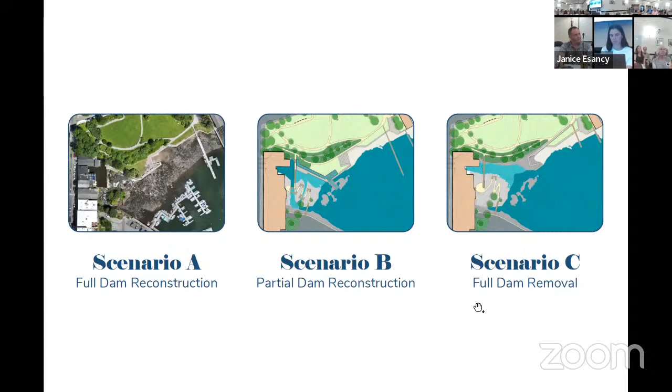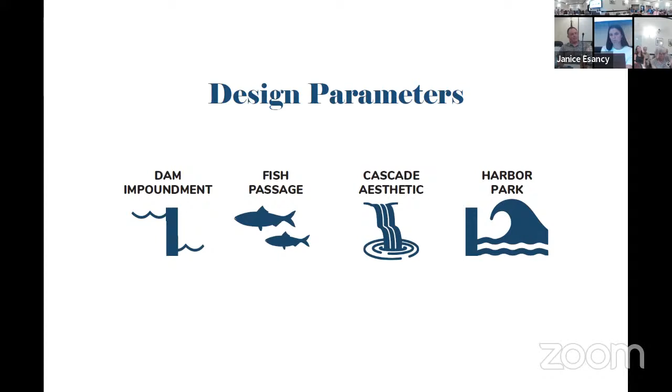Last time, you were all very helpful, very clear and instructive on 4 parameters for each of those designs: how much impoundment, what the type of fish passage should be, what the aesthetic of the cascade should be, and how we should think about Harbor Park.

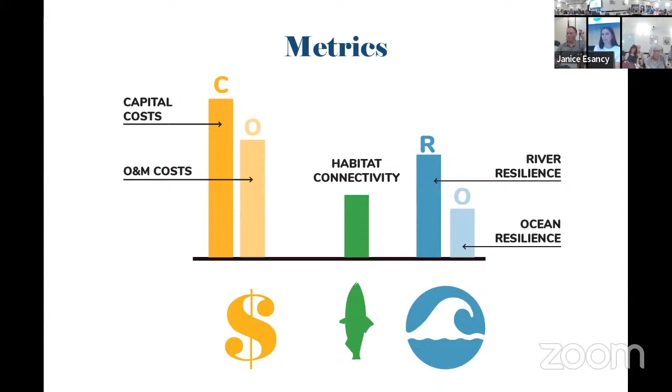Today we're glad we can report back with some metrics to help with your decision-making and with the conversation. We have numbers for cost, habitat connectivity, and resilience - the metrics we agreed were very important for you all to make this decision. Assuming that's clear, interrupt me with questions, comments, anything you need.

Scenario A, our status quo. These are the parameters you gave us last time - in this scheme we will reconstruct all dam infrastructure in kind. That would include restoring the cascade aesthetic to a uniform flow over a weir edge. It's a little toothy right now because of the condition of the dam, so getting that back to a uniform flow.

There's an asterisk: in a very dry time of year, water flow gets very low. It can't be uniform, it's just a really wide waterfall. So there's a point at which there's just not enough water coming down the river for a uniform flow. But to the extent we can, this scheme makes that weir perfectly flat so it flows over.

Would you entertain a question at this point? I don't know if - no, sorry, just for the comments. I advanced too quickly. Okay, here we go.

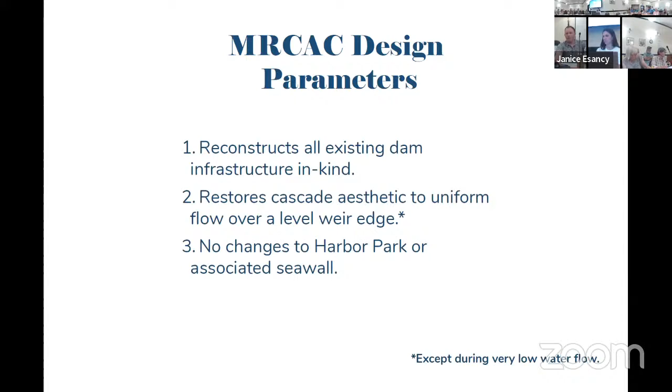So this is the space from above. You can see the edge of Harbor Park, the grounding basin, and where the cascade begins going up over the ledge. You have the weir edge here, the seawall here and wrapping around, with the buildings on Main Street all backing onto that.

We have a south cascade as well as the east cascade. In a reconstructed condition where we get that uniform waterfall condition, water would spill to the east and to the south, so you have less of a divided set of cascades like today. They still split at some point making their way down the rocks, but are more cohesive up at the top.

Just to give you your bearings, because this will be the same in the rest of the drawings - this water line is mean sea level. So this isn't sea level rise, it's not high tide or low tide, it's the mean sea level somewhere in between. The water flow coming down the river we're showing generally as average May flow.

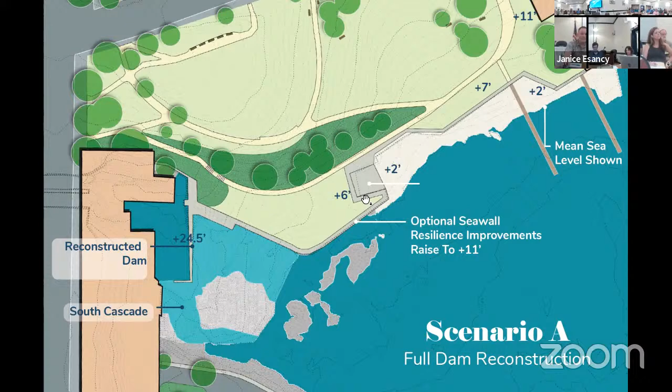I think that's at the crux of this question. So this is what it will look like - you recognize it, this is what you have today. Zooming in, you see the weir edge would be consistent, waterfall coming through here, it would be rebuilding this wall if you chose to do that. We haven't rendered raising it, since this is an existing photo. So one of our discussion points today could be whether that's what we want to do - this is at the existing 6 or 7 foot elevation.

When we look at costs - apologies, this is kind of small - the capital cost for rebuilding this dam is 2.8 million. I believe the base level was 2.6... 2.2, my apologies. So to rebuild the dam and fix it up is 2.2 million, which includes replacing the seawall in its present form - so fixing the wall and fixing the dam, $2.2 million.

And then over the course of 50 years, maintaining that will be an additional 1.8 million - that's the money you need to spend every year for 50 years to keep it in good working order, periodic repairs and maintenance. It goes up to 2.8 million if you want to elevate Harbor Park's edge up to 11 feet - that's the cost of additional higher walls and more fill, a difference of $0.6 million, $600,000 to raise it.

Scenario B. Yeah, so that was our baseline. Scenario B, this is partial dam reconstruction. This is the kind of middle path that tries to compromise and meet a lot of different potential criteria. We had a great presentation last time from Mr. Grassi, and this looks most like, I think, the design that he shared then. So this lowers the impoundment by 4 feet, modifies the bedrock to sustain the cascade to the south. This will all make sense when you see it on plan. It creates a uniform flow over a level weir edge, and in this case we're beginning to adapt Harbor Park more significantly. So with Harbor Park, we've got 4 things going on: we're introducing a pool and weir technical fishway.

We're elevating the park to reduce marine flooding, improving seawall resilience and public access to the waterfront, and where suitable, introducing living shoreline strategies. On that last one, I think that's where we still have more work to do. It's tricky working with the vertical seawall and a site like this to get a true living shoreline, so probably more to be thought of there, just full disclosure.

All right, so, yeah. I apologize if you've already defined this in the first hour that I missed. Can you go back just with that term? Which one? What is a living shoreline?

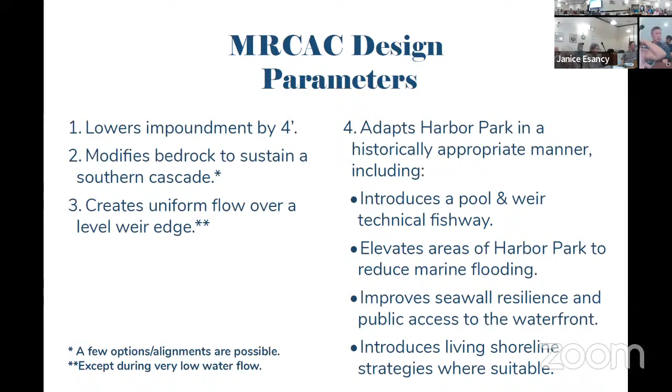Is that fair? It's great. Ooh, great. Yeah. Thank you.

So the aspiration here was to look for opportunities for that. It's tricky, so I don't think we have the best solution in here yet for that piece.

There's a lot going on in this plan. If you squint, just to begin, you'll see we still have a weir edge, an impoundment, a pool here at the top of the dam. We have the current alignment of the seawall still legible here. We'll get to what's going on down at the east. Some new things - we're seeing a pool and weir technical fishway coming down, hugging that seawall, doubling back to keep dropping down, coming through the seawall and out into the water. That's our fish passage. You'll see with these spot grades...

20.5 for the weir edge, so the top of the dam is 20.5. Today it's at 24.5, so this is coming down 4 feet.

What you're seeing over the top is one of these public amenities that Mike mentioned that's not in the budget, but something we're putting out there as an idea - a pedestrian connection over the top of the impoundment, linking you out to the ledge and a trail eventually to another bridge, linking you to the landing to the south here.

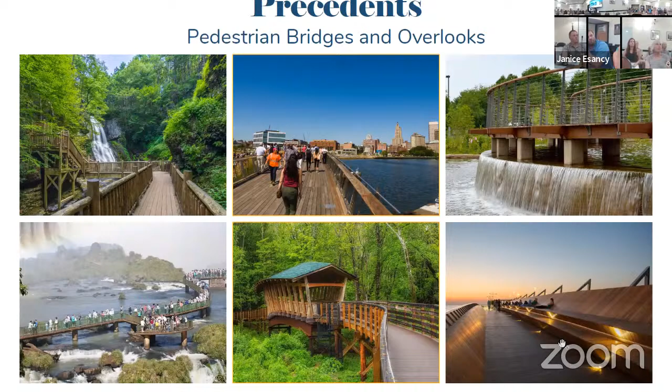And I think it would be good to break out the seawall stuff in this one as well, because all the work you did with the seawall here could really be done with the first option too. They're really almost the same, and it is what's in that cost, so we're carrying the seawall cost in the first one as well. That's the highest seawall cost and it's in all of them, so you're paying for that in all of them — you can take it out or leave it in, but the cost is relative.

Apples to apples still. We don't want pedestrian bridges or overlooks, so forget that I mentioned that — this interpretive signage was sort of building off of that idea, but might still have a place in some of the other parts we re-envision. I think the comment was that it kind of busies the concept, but I think it's still cool to consider some of those ideas. I don't think it's off the table at all.

Out of the last meeting, our task was to look at what else could happen around this, so we put a lot in to sort of feed you ideas. It's for the committee.

And I think the potential for some of that baseline is really cool, so I think it should be considered. I guess I'm just thinking, if you assume a base case for that option, how does that implicate the fish passage?

Is the lower portion, as you get increasingly above elevation 7, you have water cascading down into the fish passage from overland and things like that. Something we don't have to sort out tonight.

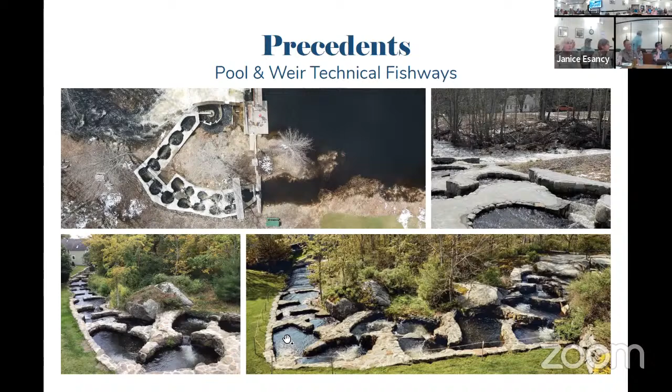Scenario C is full dam removal, right there in the name. It removes the existing dam infrastructure, does not modify the bedrock or create a constructed fishway. That was guidance from you all.

We've added the caveat with the asterisk that once you get in there and remove it, bedrock work is being done. There might be some selective tweaking just to take out barriers and make sure it works as fish passage, but this is not like previous examples you saw where there was really a built, nature-like fishway being put in.

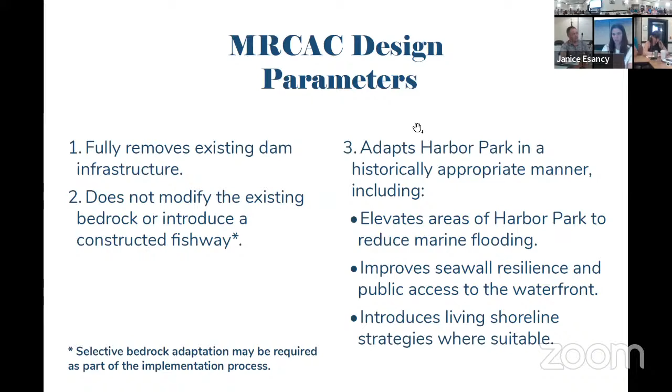This is exposing the ledge. It also adapts Harbor Park, and you'll see why.

Okay, so again, this is May, average river level in May, shown here. This is mean sea level for the ocean. It also has pedestrian bridges, trails, overlooks, all that.

Here we have the ADA accessible path shown as part of the baseline, because the existing path, which sits down here, goes away to allow us to open up the bedrock and the free-flowing river. So that requires regrading down through here to get down to that river elevation.

So you can see the contours in the background. This is where the seawall is today, right here. So if you take that away and take away the earth that was put in place to build this landscape, and reveal the historic ledge and historic river course, using the bedrock measurements that Mike's team did, this is where the river once flowed, right here.

So the waterway comes through here. In this area, we have a mixture of bedrock and boulders that are revealed when we pull back the soil, probably some cobble and boulders put in place just to shore it all up.

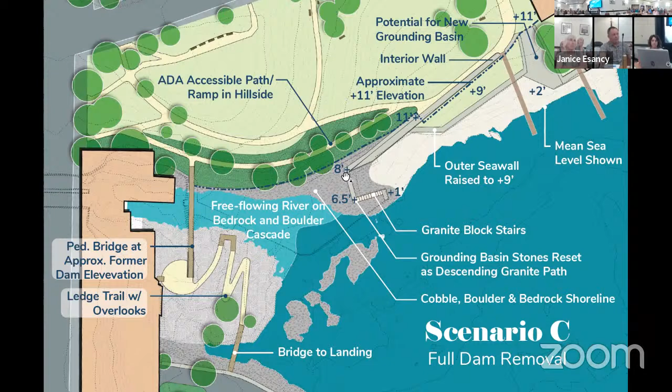Here, so much of this end of the park is changing. A way to keep some legibility of the old seawall, we were thinking, was to take the grounding basin stones and use them as a pathway to navigate down and get you down to the intertidal area.

It requires some steps for a piece, so this chunk would get you to high tide, and then if you were able, you could go down some blockier steps to get down to the intertidal elevation. So then you go back up, and by this point you're up at 11. This pathway is up at 11 with a low wall below it.

And here, this would be one where we could start thinking about a living shoreline component. We kept this panel of lawn down at 9. So instead of going 4 feet up, we went 2 feet there and said this could be a place to experiment.

Transitioning away from lawn toward living shoreline planting in my lifetime, to sort of set not the 2100 line in the sand, but somewhere in between. Also giving you that ability to step down to the water softens that Fort Knox quality that you described. It also has the grounding basin.

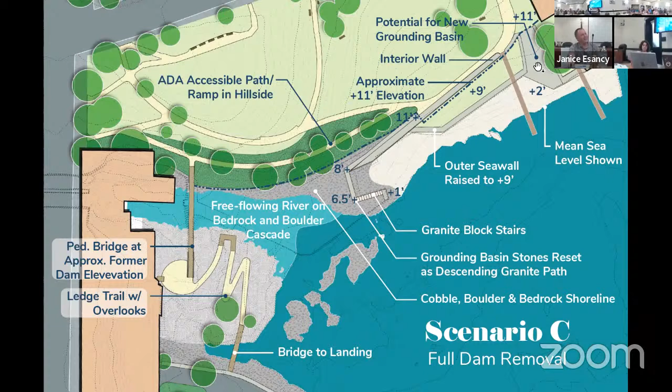So that up behind is like a 2-foot wall? This is along the 2-foot path? Yeah, wall. And there's a way to grade it, which I've done here. It's a little hard to see, but this lawn would actually gently rise up, so there wouldn't be a wall here. You could walk out onto the grass from the path and then make your way down to the wall here.

So this one took a lot of Photoshop skills, because you can imagine there's a whole lot of park here today. Using our 3D model and the contours that Mike was able to develop for the bedrock below, this is what that waterway would look like.

You would come below the buildings where the impoundment is today, there'd be a dry ledge. The water course sort of follows along.

Sorry, can you zoom in? Would it be possible? Yeah, here we go. Better? Yeah.

Comes through here, curves its way out toward the water. There's some area in here that isn't just rocky boulders underneath, there's a bit more ledge down there, so that would be exposed. This is that idea of a path falling down. I ran out of time admittedly and didn't put the steps in here, but they would be right there. This is the hillside that would be regraded to connect down to this waterway.

This is that new ADA accessible path that would link you up to the top. There are historic tree plantings from the Olmsted design in that hillside. Additional design would be done to really work around and preserve as many of those as possible. There's also a historic planting plan for this area, which we would recommend recreating, trying to stitch this back together to look a lot like the hillside that's there today, but now just bringing the toe of it to meet this water.

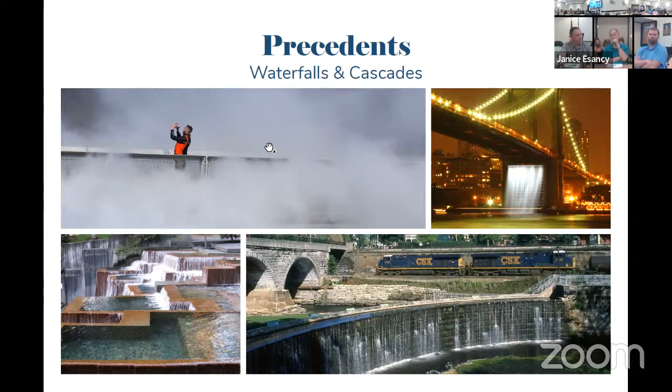It's possible for sure. There's projects like this one in New York City under the Brooklyn Bridge that did that on a massive scale, created this piece of public art that was a waterfall. It's a series of big pumps, bringing the water up and it's falling. There's an artist that does these projects using, instead of a cascade, mist to create these cloud-like effects. But we were just imagining, trying to explore ways to reconnect the river, but what could it look like to recall and remember that line of the cascade. So it might fall in the distraction bucket when we're talking about some of the decisions, but also just to crack open a little window to the idea that there are things we really love about that waterfall and they don't have to go away in every scenario.

So side by side: costs, resilience, and fish connectivity. Sorry, I didn't pause on it on scenario C, but the cost for that would be 2.9. And then by removing the dam, obviously the maintenance goes down markedly in this one, so 400K over 50 years. It has the highest resilience in both river and marine, because of the undamming, and then also the highest fish connectivity. So that's them side by side for costs, resilience, and fish connectivity.

Why is the marine different? Marine is different in this one, we just have so much... we're kind of lower. I think the living shoreline capacity here and just less infrastructure. It's a good question, it could come down a little, probably. It is ultimately... it has a lot of the living shoreline idea.

Why can't we have living shoreline included in option B, instead of that wall, if we're not all a fan of that?

Sure, maybe. That's our cost baseline for comparisons between a living wall versus a seawall. Nominal, similar, because we're talking about planting the area with grass. So if we're planting it with adapted native shoreline plants, we're still planting it, still putting soil in. The height of the wall will be a little lower.

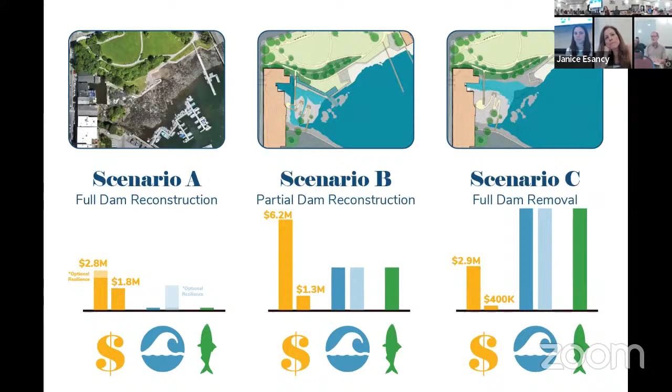You take a string line to the seawall right now, what's the difference in height? Is one 4 feet higher or 4 feet lower? Help me with this, is that the piece you're talking about, where they just rebuilt that nice walkway where all the boats go out? So if you take a string line from there right across to the seawall right now, is that level or is it lower?

I will tell you, let's go. I'm sorry, this might not be your wheelhouse, but I've been curious about if the sea level were to go up, is the whole place where we park gonna go underwater too? Yes, it will. The edge of the park here is at about, based on these contours, at about...

Elevation 10, above sea level right now? No, elevation 10 above a datum, an invisible datum in the world, so everything I reference goes off the same benchmark. So low tide is down like -5, something like that, and 5-ish is high tide. Your seawall in the park is at 6, your seawall at the landing is at 10.

So the landing is 4 feet higher right now. It's actually close to where we're talking about raising the park. Okay, that makes sense. But that's right there based on these contours, I'd have to zoom out to tell you, I don't know the whole edge of the landing. And I can tell you, Jonathan, that much of the town landing is below elevation 11. So when you think about these elevations, I have seen representations of a similar exercise of taking essentially that high tide line and raising it 3.9 feet, and quite a bit of the town landing is underneath that. Does that help? Yeah, okay.

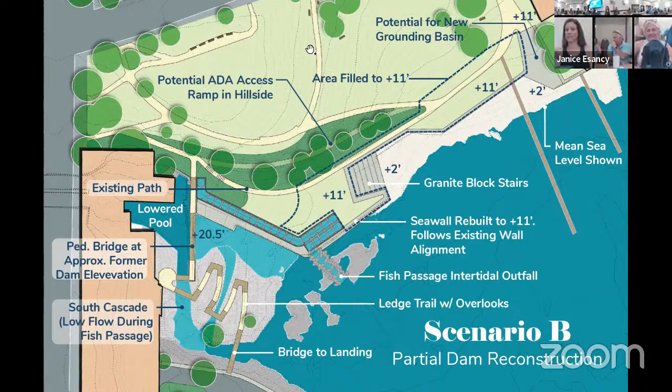Everybody in favor of closing the meeting? Why don't you gavel, that's the prerogative of the chair. Yeah, I had to do it. As soon as I said gavel... that's okay, fine. Phones are blowing up still. I'm like, oh people, stop. No, they don't, it's actually about this.